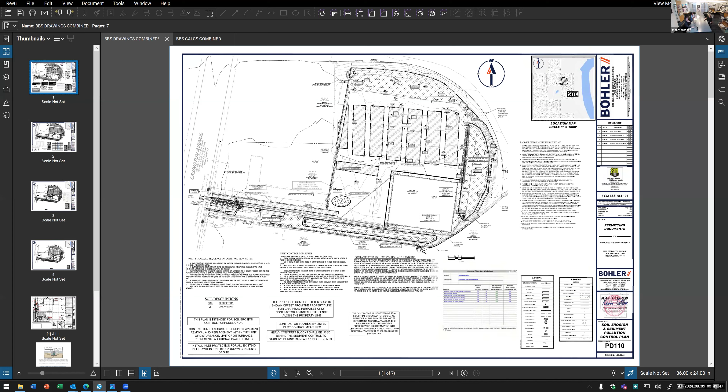So this is the entire site. If you zoom in on the building, Anthony, yeah, that. So the building is where the mouse is. To the north and to the west are continuous trench drains. Those trench drains discharge into a rain garden on the east side of the building, and then a rain garden on the south side of the building.

You can see the rain garden on the east has an inlet at the south end that will go into a discharge pipe. That discharge pipe runs down the site and continues along to discharge out to the public way. There's a second discharge line at the west side of the rain garden that also ties into that line for a continuation.

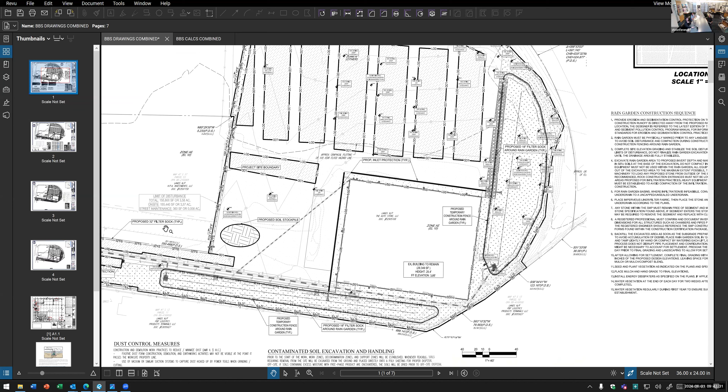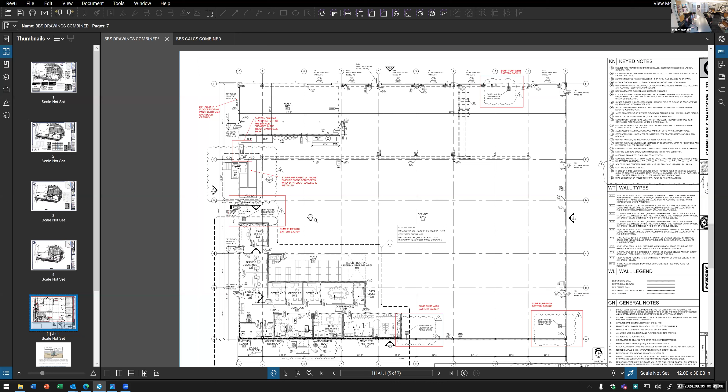There's 4 sump pumps being proposed. There's 2 down on the south side, 1 on the north side, and then the 4th one down on the west side. So we're proposing to discharge those lines at 36 inches above grade. We've got 24 inches of protection for the panel system around all the door openings. Can we show them that?

And we're talking about 3 inches of water, right? Yeah. All right, so the other part, I just want to jump in. As you can see, the panels around the doors are raising our elevation approximately 21 inches. Yeah, 21 inches was the requirement. The panels are 24 inches tall for protection. We are, in the worst case scenario, looking at 3 inches of water on the floor.

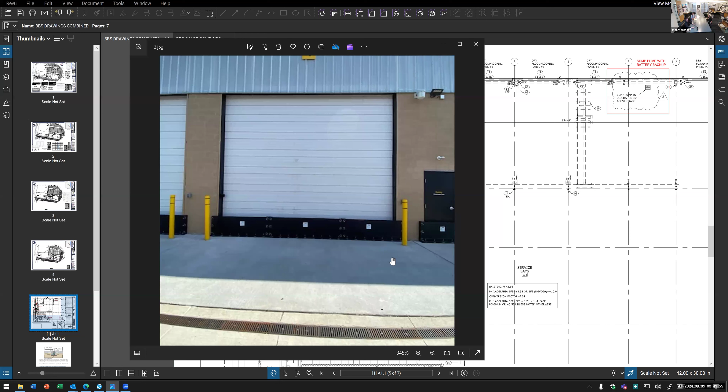As Eric alluded to, that water is going to be conveyed to the rain gardens. But more importantly, we are going above and beyond to provide a system at hundreds of thousands of dollars worth of cost to protect for a much higher elevation. I wanted to show these photographs, but again, we're talking about 3 inches of water. Anything inside the facility that could possibly be damaged has been eliminated, so we're not looking to have any equipment or anything of value on the floor. I just want to have that context of 3 inches of water on an existing slab and the measures we're taking to protect our facility and meet the intent of your ordinance.

We've also been working with staff for over 6 months. Over 6 months we've had literally dozens of reviews. It's Penske Automotive. Penske Automotive always does the right thing. As you know, we're going to be employing 60 people at this facility. Right now those people are essentially sitting at home while we go through this process. But we've had very favorable feedback from staff.

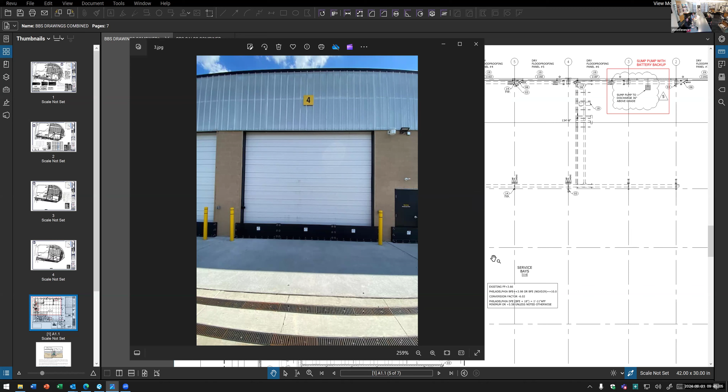As Eric said last week, we got approval for the battery backup in lieu of a permanent generator. Today we're hoping that as you look at the extent we've gone to for our conveyance of the water, you'll see there's no other practical place to take that water. We're essentially conveying that water back into the rain gardens. We're not hooking up to the storm sewer. Hooking up to the storm sewer would only put more burden on it and also put us in a situation where if the area is flooding and the storm sewer is surcharged, we're adding to that.

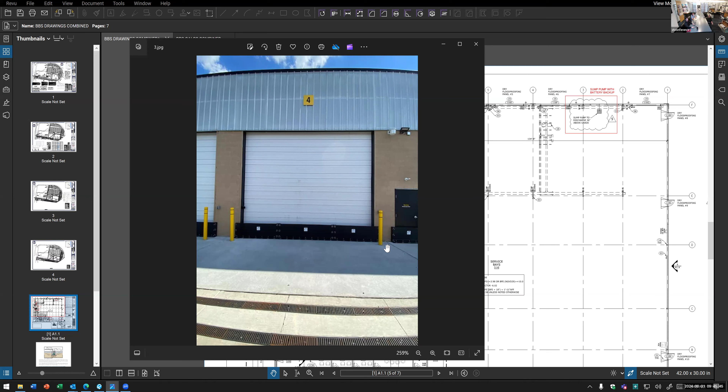We're basically creating a worse situation for the water that's already conveyed in that pipe. So by discharging into the rain gardens and letting that water find its way to the sewer, we feel that, again, we've done this in concert with staff, this is the most practical and logical way to do it.

This is a brief overview of everything. As Eric said, we've even added stairs and ramps to raise our elevations and to deal with an issue that is pretty minor in our world. 3 inches of water. We're not talking about surcharging this building with a foot of water, 2 feet of water.

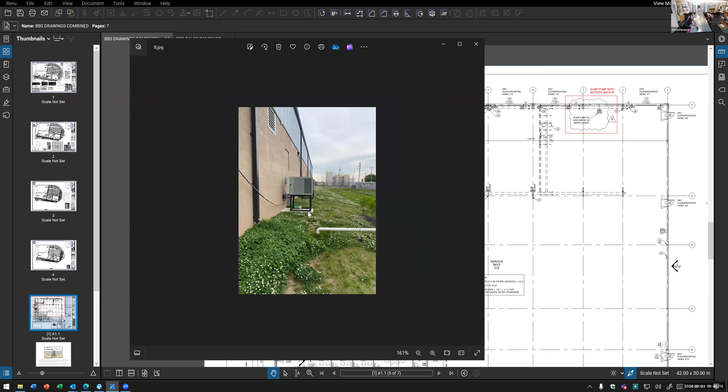And as you can see here, the existing roof drains are also splashing onto grade going into those rain gardens. So the intent of the design for this site, we're not doing anything unique is what we're proposing.

And that pretty much summarizes our review where we're at today. And we're hoping that we will get your approval and we can move forward and we can occupy the building and bring back those jobs that are missing right now.

We've closed out all of the inspections for approval. We just can't get a C of O until the blessing for all the flood protection is in place. This is the last piece we need to get final approvals. At this point, or after the approval, we would then install the sump pump systems and then call for inspections and ask for a certificate of occupancy so we can open the facility.

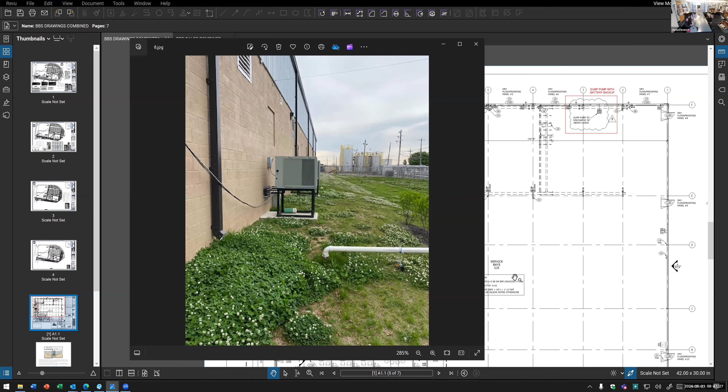And that concludes our presentation.

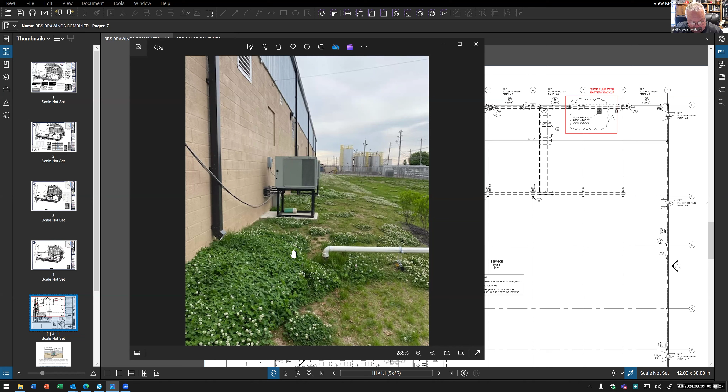All right, so you mentioned the 4 locations. Now, the discharge of the 4 locations, do these discharges go to pervious or impervious areas? They go to the rain gardens. Both. Two sides of the building have concrete and asphalt. 2 sides of the building are the rain gardens.

Okay, so two go to pervious, and 2 go to impervious. And where we have the impervious, that's where we've got the continuous trench drains that would collect that water. Okay.

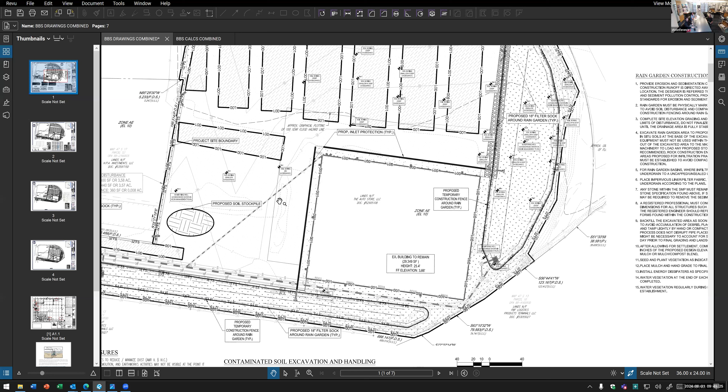You have a freeze concern with the discharge going to the impervious areas. If there was flooding occurring, that wouldn't be frozen at that time. We would be discharging back into that same water that would be there. It's all seepage that we're contending with. So we'd be putting the water back to where it came from.

Okay. Are the pumps already installed? No, we're waiting for final approval to start this work.

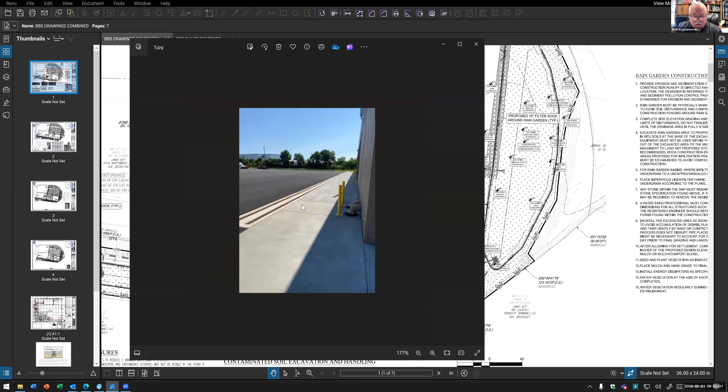Okay. All right. Answered some more of my questions with, my last question, could you go to your photograph number 5? That one there. Yes. Them 2 10-inch lines that are exiting the building there, PVC with PVC 90s.

What are they? They're roof drains for this side of the building that tie into an underground system. Anthony can go to the drawing 2.

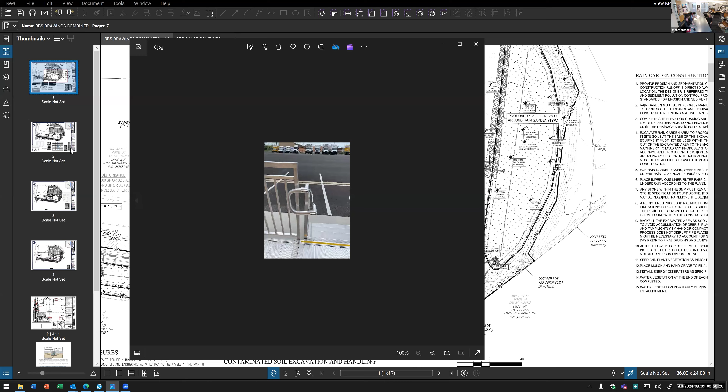That diagonal line off the northwest corner, that's that storm line. It's a 15-inch line extending off the corner of the building that discharges out. If you follow that line down, it ties into the same storm line that is routing down the property. That was an existing condition, and this is all an existing condition.

And that's directly connected to the public system. As it continues west, yes. Okay.

And this is a little off topic of the primary request, but the roof drainage inside, because it's exiting the building. First of all, it's not exiting the building below the 36 inches required depth, and it's exiting the building in non-metallic piping. Would you have knowledge if the storm drainage inside the building was metallic or non-metallic?

I would have to look into my photographs to confirm what that material was. Okay. All right. Okay, fair enough. So the 2 discharges.

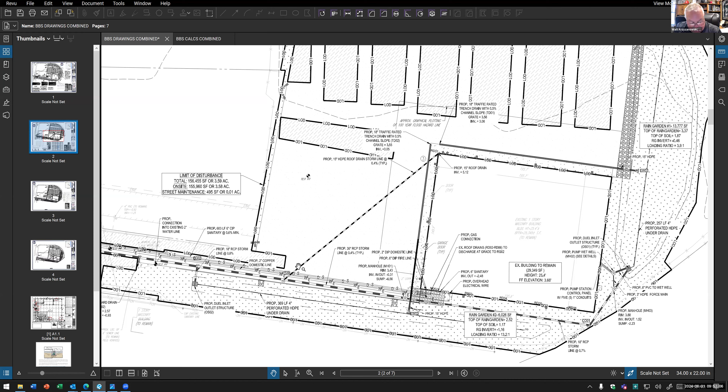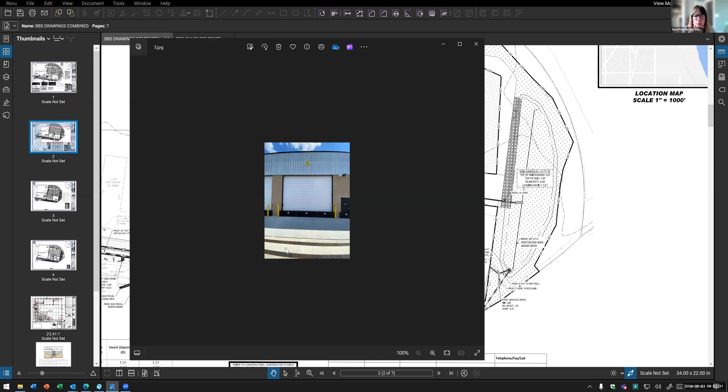Good morning. I'm a little unfamiliar with this type of flood proofing system, and you've probably answered this question, but would you mind letting me know how these pumps are fed? Are they pumping groundwater seepage, or is it runoff going towards the building that it's capturing?

No, we perform calculations based on 21 inches of water surrounding the building and what the seepage rate would be. So we designed the sump pump system to deal with any of that seepage coming into the building. We were going to depress the top of the grate an inch to make sure we have a low point, since the floor is flat. We've got it around the exterior perimeter where you'd be getting infiltration.

Okay, so you have your normal groundwater table, and then you're predicting your high groundwater table based on these large storm events, and that's how you're coming up with the flow rate into the system? Yeah, we use the control joints and the seepage rate going through the concrete block walls. Those are all part of the calculations that were generated.

Okay, and so the pumps click on during the high stormwater event. That discharges onto the impervious surface next to those trenches. The trench drains pick up that discharge and carry it to the rain gardens.

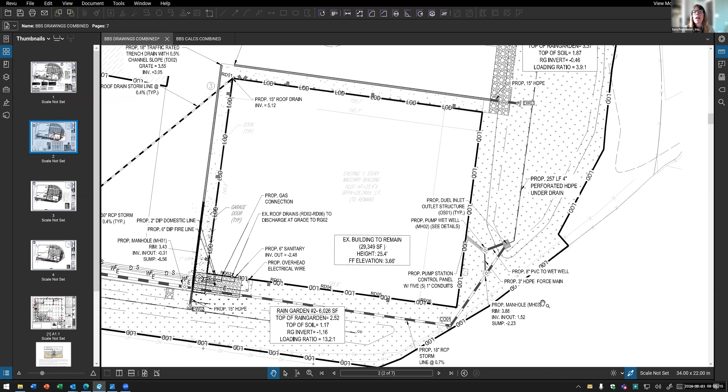Okay, so the way you understand the system to work is that the trenches would go to the rain garden, fill up, enter the inlet, and be carried out through a series of stormwater pipes to the right of way, is that correct? It's all a gravity system, correct. As just a purely gravity system is your understanding.

Okay, right, correct. And so I'm assuming this system was constructed under a PWD stormwater permit. That I had no involvement with. We inherited these drawings, so I don't know all the steps the landlord went through for approvals and construction.

Okay, well, I think with this system you'd be adding additional flow. I'm just wondering if this has been resubmitted through the water department for analysis. Not by us. Okay, and my last question: are you aware of any groundwater contamination on this site? I am not, no.

And Sarah, to go back again, we're talking about a very small amount of water. We're not talking about an excessive amount of water, we're talking about literally 3 inches of water. 3 inches of water over how much area?

Well, that's the elevation, we're below the floodplain. When we calculated for a 24-hour period, the seepage rate we have for the building, if we didn't get rid of it, would be 1/2 inch. So what's the flow rate of the pumps?

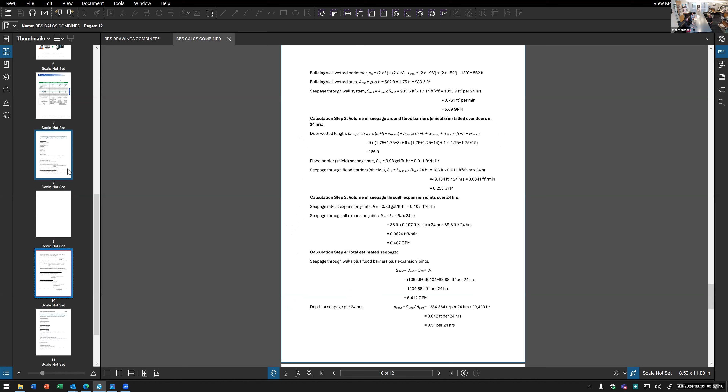They're excessively over designed. I don't have my mechanical engineer here this morning, but I can get you that information. We have it in the PDF of the BBS, this one. We have the plumbing schedule, and it's a different PDF from the other presentation.

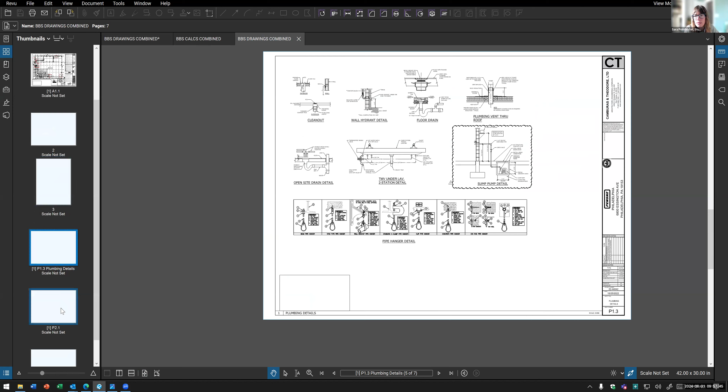If I may, the calculation appeared to indicate 5 GPM. Oh, thank you. Does it have a duration of pumping? On the battery backup, I think it was over 5 days of pumping ability before the batteries would run out.

It is a truck shop, and part of the service is replacing batteries, so there's plenty on hand. To get to the heart of your question, we're designed to run for 5 days, and we also assured staff that we would have additional batteries on hand if after 5 days we were still deluged with water. So we think we've met and exceeded that requirement. Okay, but bottom line, we're sending a lot of water to these rain gardens.

Potentially, potentially. Okay, those are my questions. Thank you.

Thank you, Sarah. Mike Bellotta, no questions. Mike Ingram, no questions.

Brian Gilbert: Yes, I have a question. This facility is for Penske Truck Leasing, am I correct? That is correct. Is there maintenance done on site? Yes.

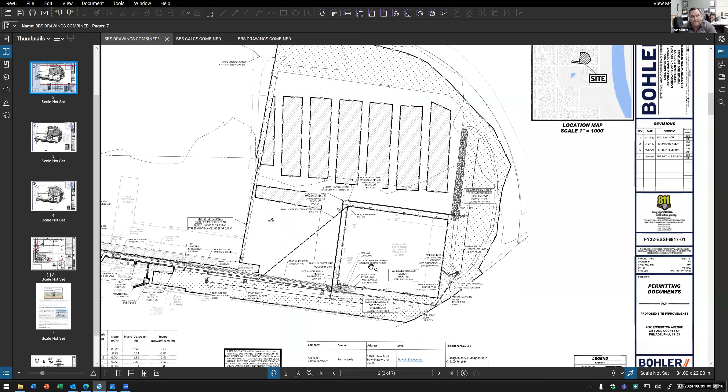So you're doing truck maintenance. Have you considered any system for oil interception or oil separation? There's a unit inside the building. We do have an oil water separator. That's a separate system, but for these drains in a flood condition, it's reasonable to say

that oil could get in these drains and you're going to spill it out to the rain garden, correct? Here are the low points. I guess there would be a possibility. The basins are sealed on the top, so there's 2 floor drains inside the building. That's what we're dealing with for the oil water separator system.

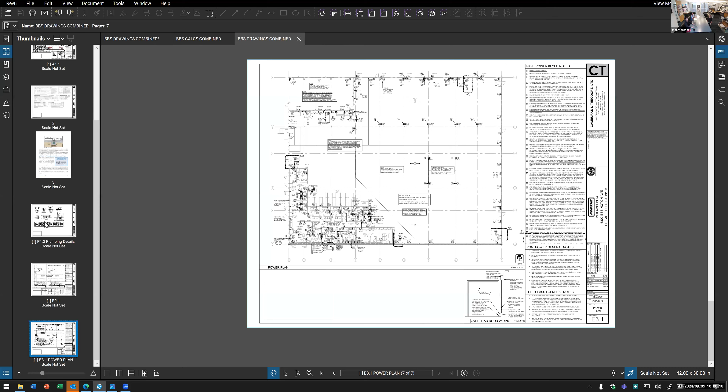If you go back to that other plan, and then go to the plumbing plan. No, but I don't think there's any potential. So if you can, there's a wash bay up at the top. Go up to the top of the page. Those 2 floor drains there are the only inlets that feed into that oil water separator.

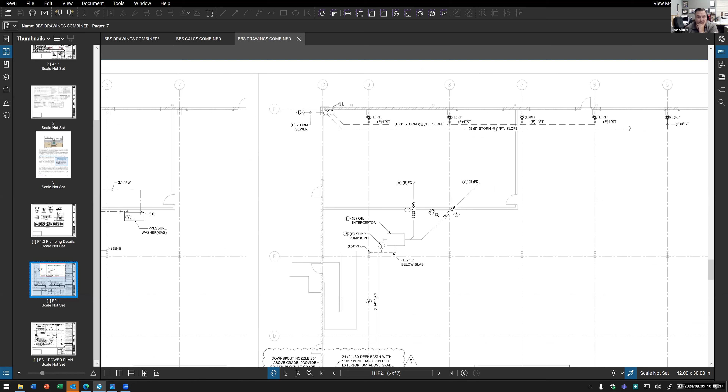Okay, so hear me out. I'm seeing a flood in your building. I'm seeing that flood is going to take up the entire footprint of your floor. When it reaches those drains, it's going to drain into the oil interceptor. The oil does float on top of the water. As that oil interceptor overflows, you could potentially be spilling the contents of the oil interceptor to your 4 sump points. That is a possibility.

Am I wrong? We're talking about a half inch of water. We were just talking about 3 inches of water a minute ago. Well, yeah. Yes, that could be a possibility. Even with 3 inches of water, your tires are sitting above the floor.

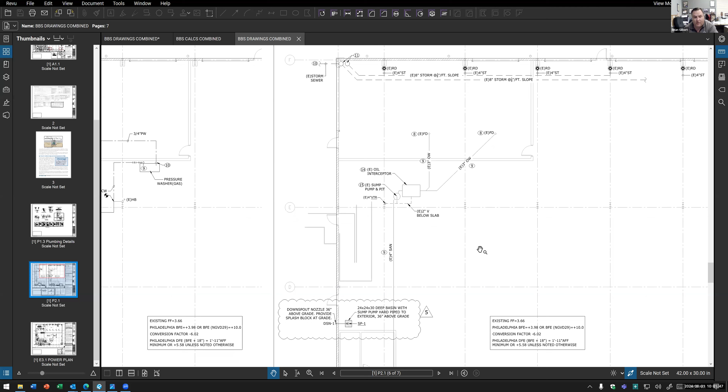Let's see the backflow protection. I know on the discharge of this, there's protection, so it doesn't back up. I don't know how to... I'm just trying to think. Under worst case scenario, why would we ever be discharging oil? It's what the point of an oil interceptor is - to not discharge oil.

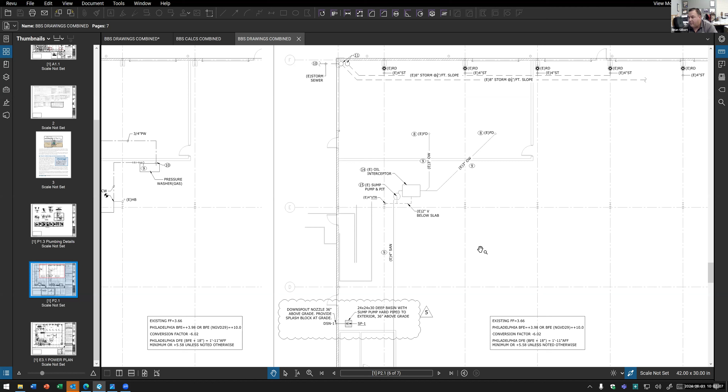Right, so what would you suggest in this situation, in an emergency case? What are you suggesting? My suggestion would be something as simple as an oil minder type switch, like you would use in an elevator sump pit, on all your sump pumps. It would allow the pump to run with water and shut it off when it hits oil. That would be my suggestion. I think that's a good idea, and we'd be amenable to that. I just learned something new, so that would be great.

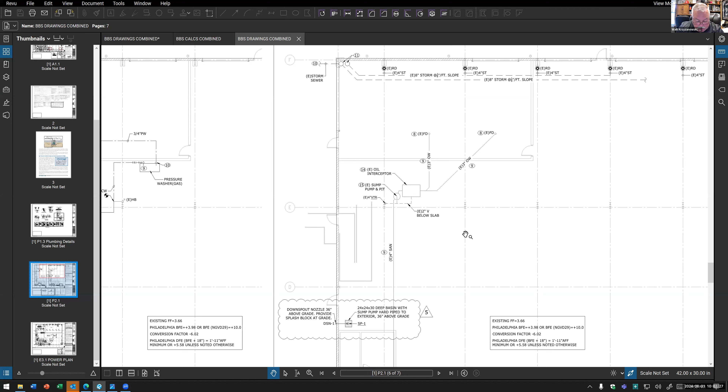Okay, that is all I have. Thank you. Thank you, Brian. Patrick McDonald: Yes, I have a couple questions.

So we're talking about discarding the water that would be getting into the building, in the case of anywhere from a half inch to 21 inches, I believe. No, 3. Per code, we calculated it for - we had to be 18 inches above the BFE. So all of our calculations are based on 21 inches.

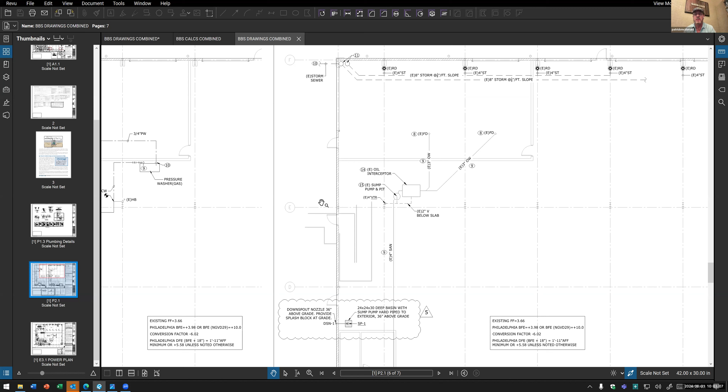Okay, so up to 3 inches. Now, when that water is discarded from the building, it's going, as you gentlemen have said, into the rain garden. However, if there's a flood in the area and the water has risen up to a certain level, it's going essentially back into the river, correct? In my opinion, because it's going back out of the building into the flooded ground area, it's not specifically going into the rain garden, I believe.

And that's the second part of my question. The second part is, if the rain garden doesn't have any exit for the water into the storm sewer in this case - if it did, it would be a problem, because then all the river water would be going into the sewer. So I understand why it doesn't. But we're essentially pumping the water out of the building back into the river. Is that the way that you gentlemen see it?

I would say not into the river. We're putting it back on the site. It's water that would have infiltrated from the site into the building, and we're putting the water back to where it came from. So Sarah mentioned before, asking whether you would consider this groundwater or

stormwater. What would we be considering this? I asked the board as well as you gentlemen. What are we considering this? Are we considering it flood water from the river, or stormwater from essentially the sky? There's a reason I'm asking, because we're not permitted to allow for disbursement of water into a pervious area unless for commercial use. So I want to make sure we document what we're talking about here. What are you, as engineers, considering this water?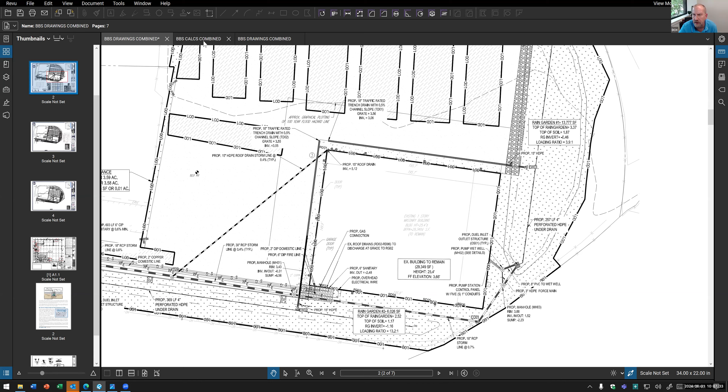Were the calculations done for 3 inches of water? I'm going to ask the chairman if we could request a copy of those calculations be sent to us. If you guys could email those calculations, could we take a look at those, please? Absolutely, no problem. Are there any hydrocarbon switches specified for the sump pumps that are on the drawings today? No.

Dave, does that conclude your questions, or are you still going? Yeah, everyone's been asking questions, so most of mine have been answered. Gentlemen, while Mr. Hoffmeister is looking at that, if you could send the information he requested to Philmato, and Philmato will distribute it to the board, please. Yes, and one other clarification, what I missed, I apologize. What year did you indicate the building was constructed? 1950? Yes.

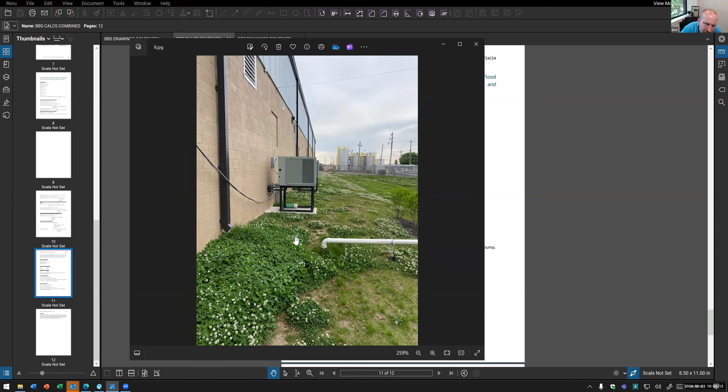Could you pull up picture number 8, please? Can you identify that pipe that's coming out of the ground? Or is it discharging to the ground, or is it coming out of the ground? I would have to investigate it, and with some other pictures, I don't know the answer to that. Can you zoom in on that fitting? Is it coming out of the ground, or is it discharging?

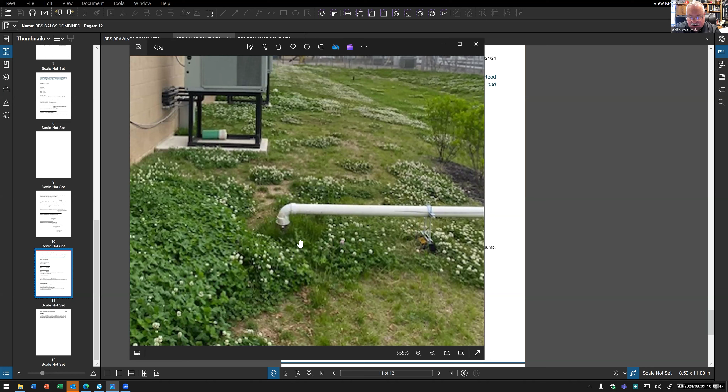That's an existing condition. Yeah, it's an existing condition. Right, I'd have to investigate what that line is for. Well, based on the unistrut, it's obviously a newer pipe, so we would need to understand that.

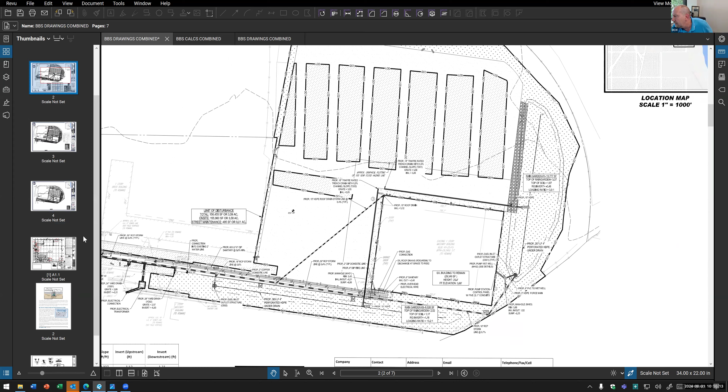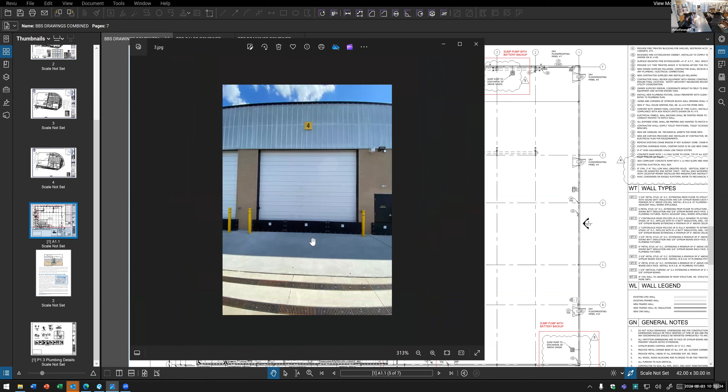And then I'm going to ask you to go to the BBS drawings combined, page 2 of 7. All the doors would have panels. All the doors, but the one where we added the stair and the ramp, okay, and then there's one coming back down. The picture with the ports. Yeah, we had the panels installed last month, and those are portable. Yeah, they're portable. Correct, we have the storage inside the building.

Right, we've got an operation manual of when they need to be implemented, and all the people responsible to put that in motion. So just to reiterate, with the trench drains around the building, which are basically the same, or close to the same, as the finished floor elevation, and with the panels up, again, the assumption is that the floodwater elevation would be above the trench drain elevations, thus it was seeping into the building. So we would be discharging basically back out of the building into floodwater. Correct, correct.

Okay, got it. Okay, Walt, I have no further questions. Thanks, Dave. Michelle Brisbane? Walt, I have no questions. Thank you. Shane McNulty? No questions. Okay, Alan?

I do not have any questions. Okay, great.

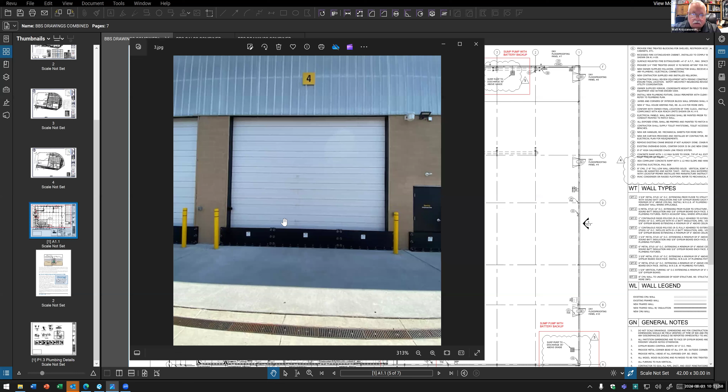Gentlemen, thank you for your presentation and for answering the board's questions. Again, this case is a little bit complex. Do you have anything else to add before we enter into deliberations?

No, I think you've asked some great questions. This has been a learning experience for all of us. I live in Florida, and I'm very well versed in hurricane and flood. I think the amount of seepage we're talking about, we've made every stride to work in conjunction with the city, with your engineers. We spent a lot of money putting a lot of systems in place. We know it's not a perfect solution, but given the existing conditions, we think it's a really good solution.

Penske always does the right thing. I think that of all our clients, Penske is probably superior to a lot of people. We don't take any shortcuts. What I learned today about putting some extra belts and suspenders onto the sump pits to make sure we're not conveying oil and other things into the rain gardens is taken to heart, and we absolutely will follow your recommendations.

We sincerely hope that we can move this ball forward so that the money we've spent thus far is put to good use and that we can get 60 employees back into this facility and start providing goods and services to the community. Everybody has been great. It's been an educational process.